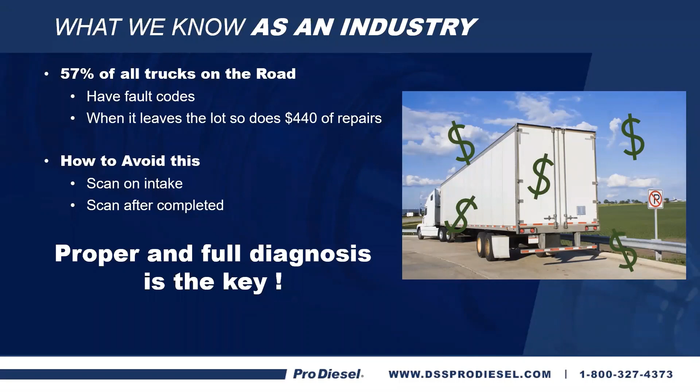The proper thing to do is get a full diagnosis, full. And you're going to get tired of hearing me talk about root causes. Root cause is the number one thing we have to point out. We need to figure out, when you have an injector that fails, is it a fuel-related problem, an electronic-related problem, mechanical, or just human error? The most obvious part of a failure is not usually the probable cause.

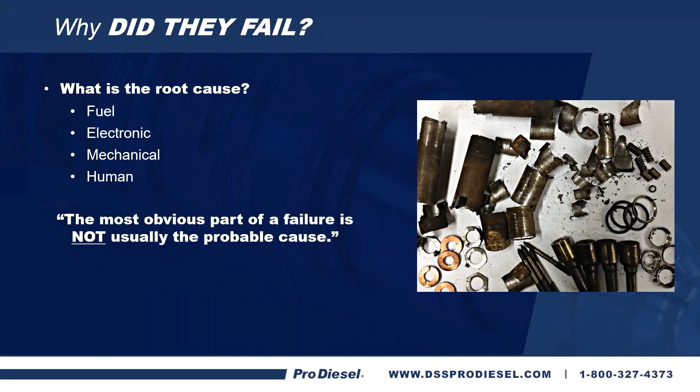So again, you must find the root cause before replacing the injectors. Something caused that injector to fail—whether it was dirt, contaminants, water contaminants, or electrical. These injectors are made to run about 750,000 miles before they wear out, so anytime under that, there's a good chance it's not the injector that caused the initial failure.

If you don't fix the root cause, guess what? You're going to put in a set of injectors, you're going to have the same problem, and you're going to think it's an injector problem. No, there's a root cause to it. We'll go over a little bit about what those may be as well.

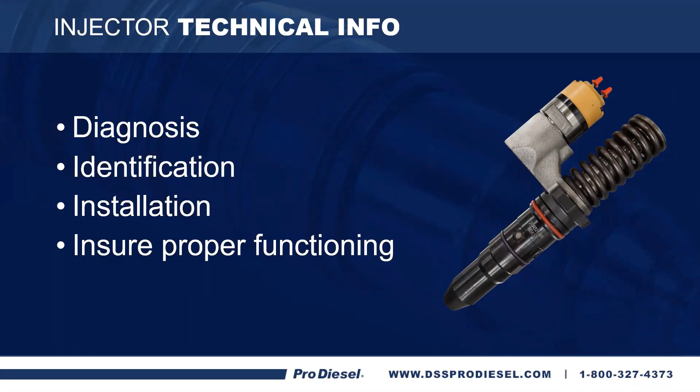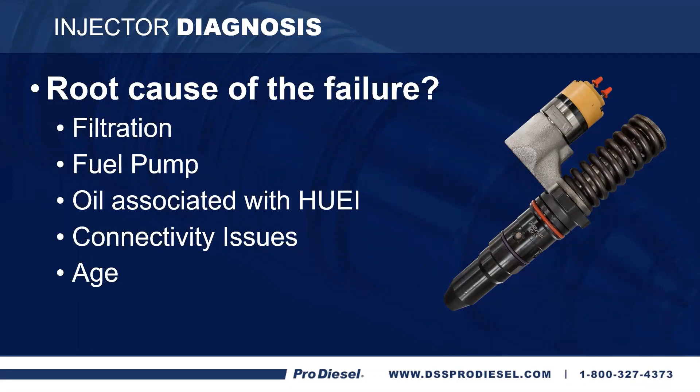So today we're going to talk about diagnosis, some identification of the issues, some installation procedures, and then make sure you get a proper functioning injector when you're done. Root cause—is it filtration, fuel pump, some oil associated with some of the HEUIs, a connectivity issue, or just pure age? Did it finally give up the ghost?

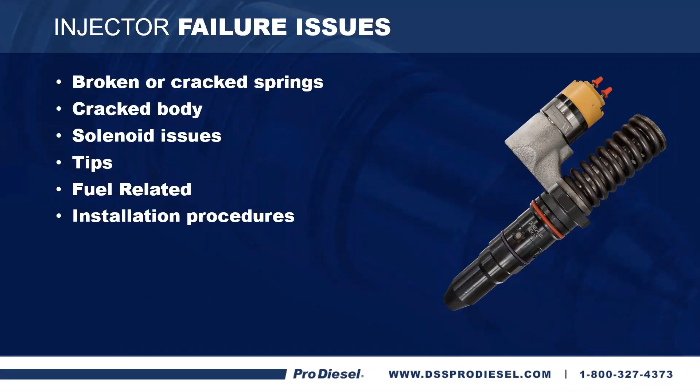There are some common injector failure issues we'll talk about: broken or cracked springs, cracked bodies, solenoid issues, tips—some information around tips—and then some information about fuel-related pieces, and also some installation procedures.

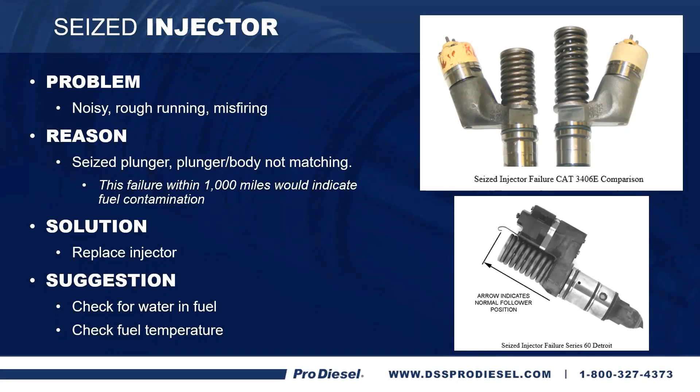It's actually stuck in there. Most of the time when that happens, if it's within the first 1,000 miles after you've replaced the injector, it's more common that it's a fuel-related issue, with a piece of dirt contaminating it and locking it up so it won't flow freely. You're going to have to replace the injector. You need to check for water in the fuel or the fuel temperature getting too hot, as that can cause a problem too.

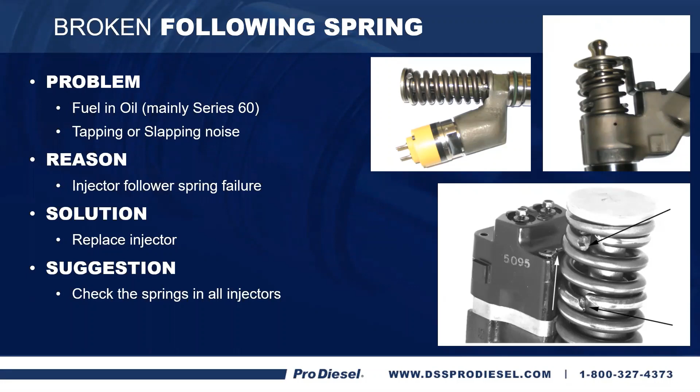A broken follower spring - you can see in the pictures where they're broken. You'll normally notice this as fuel in your oil, mainly on a Series 60, or you'll get a tapping or slapping noise. The injector follower spring has just failed for whatever reason - age, or who knows what. Sometimes they just do. You'll need to replace the injector, and you'll need to check the springs on all the rest of them, since they may all be at an age where they're starting to fail.

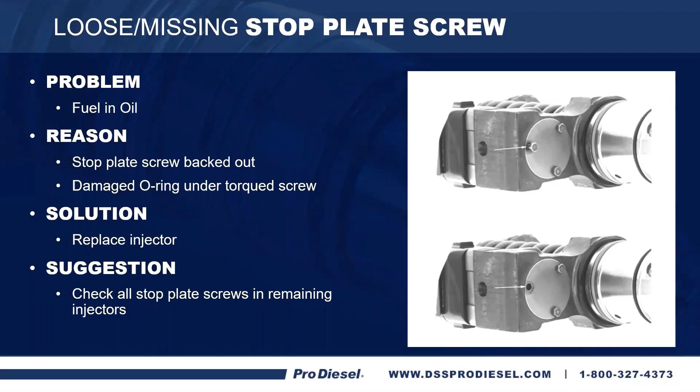Missing, loose, or missing stop plate screws will also get you fuel in your oil. Those have either backed off or been over-torqued or damaged under-torqued. So what I'll tell you is don't mess with these screws - they're set from the factory, torqued down to the proper specs. Thinking that turning them a little more might help will flatten the O-ring incorrectly, so they'll be improperly torqued all the way around and you'll have the same issue. Most of these break if you get them just a little too tight - they break right off. You can see what to do there - you'll have to replace it and check all the others as well.

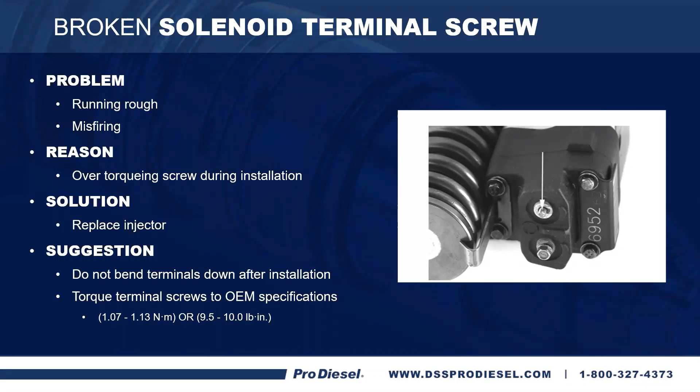Failed or blown spray tip failures - here's an interesting one. Of course, it's going to run rough, misfire, have low horsepower, or black smoke. The reason it happened is the unit was damaged during installation. We see a lot of people bump these, drop them, or hit them before they install them. It could just be fatigue too - sometimes when you get close to 750,000 miles, they start to wear out.

The other cause is water contamination. If you get water in your system and it gets all the way to the injector, water is not going to compress and it will blow that tip and tear it up. Or you've got a dropped intake or exhaust valve, which could hit it as well. And of course, you need to check all the rest of them to make sure you don't have that same issue in some of the others.

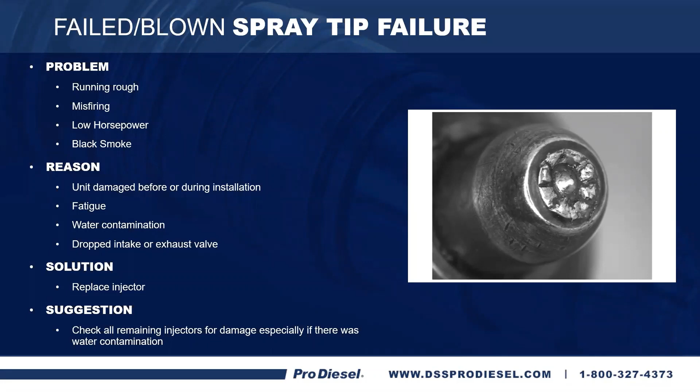A low pressure plug leak - you're going to notice fuel in the oil again. The main reason here is it's gotten old and fatigued, and you need to check all the rest of them because that means they're probably all about that same age with that same issue.

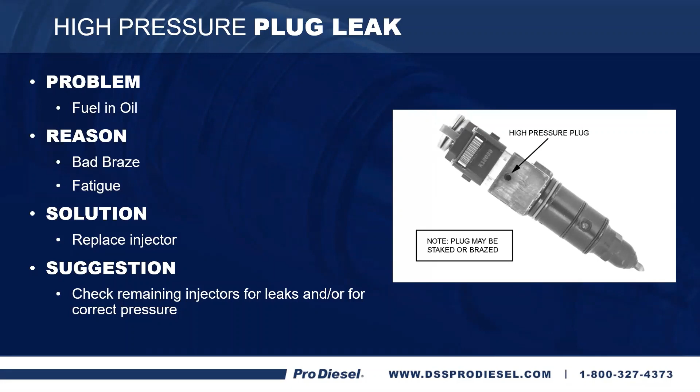High pressure plug leak - again, fuel in the oil. This could have happened from a bad braze, or it could just be fatigue. So you'll need to check to see what you've got, and again, check the rest of them. These are just some of the highlights of seeing how these work and what you actually see as a failure.

Here, trim codes - we've been asked a lot about trim codes, so I wanted to talk about that. This is something you must do on certain engines - Detroit and Cat, only certain platforms of those actually need them as well. You'll need software to install those, and most of the time it's the OE software.

There is Cojali - it will do Cat as well as far as putting the trim codes in, and it must be done to have the engine run right. The reason is you're telling the ECU that you have a new player, that it needs to learn, that it's going to run a little different. It's going to play that when you put a trim code in - it knows where to start the process.

If you buy CAT injectors from us and you need the trim code, we will send the disc with the trim code. We have all the OE trim codes for those. The key is to make sure that if it needs it, we always send it. If it doesn't need it, we don't send it. We get phone calls saying they didn't get a trim code with their CAT injector — you're not supposed to with that injector, it doesn't need a trim code.

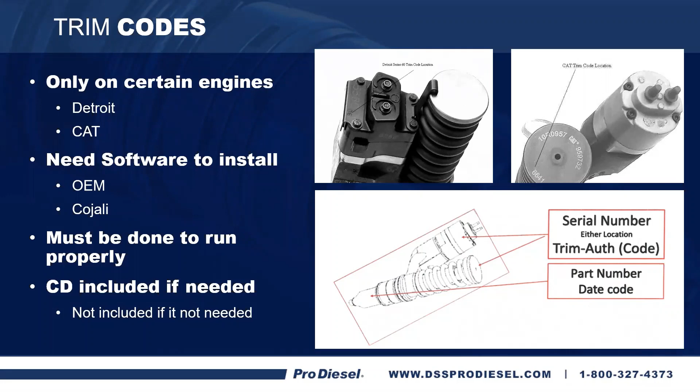On the international HEUIs, a lot of times you get a split tip, and this is normally due to low fuel pressure, air in the fuel, misalignment, or a worn injector tube. If you're putting another set in and the injector tube's worn a little bit, it's going to cause a misalignment. If you've dry started this engine, turning it over without doing the right things, you will cause this tip to crack. The reason is the hydraulic cushion caused by the fuel oil.

Dry starts will pop these things in a heartbeat. Split tips will happen no matter who you buy these from, whether you buy them from us or anyone else — they will happen on a dry start.

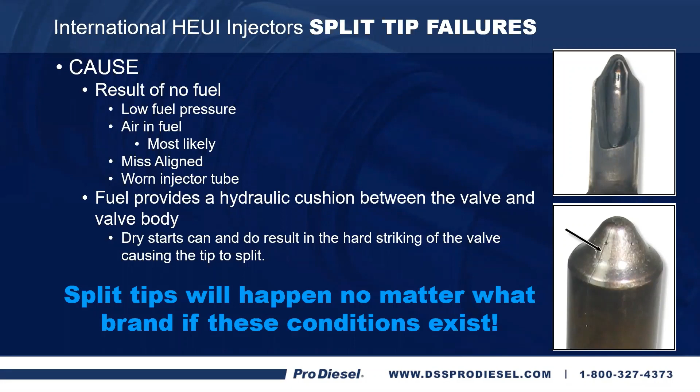The corrective thing to do to avoid that is to prime the engine before you start it, and operate the engine with proper fuel pressure. Make sure you're getting the right pressure — low fuel pressure will cause this because you're not getting the cushion. You need to replace the fuel filter, clean the fuel strainer, check the lift pump, or you've got air in the fuel. If you get air in the fuel, you're going to get the same thing that happens on a dry start.

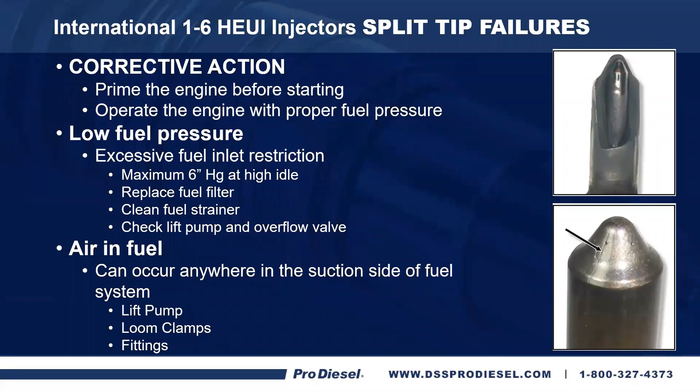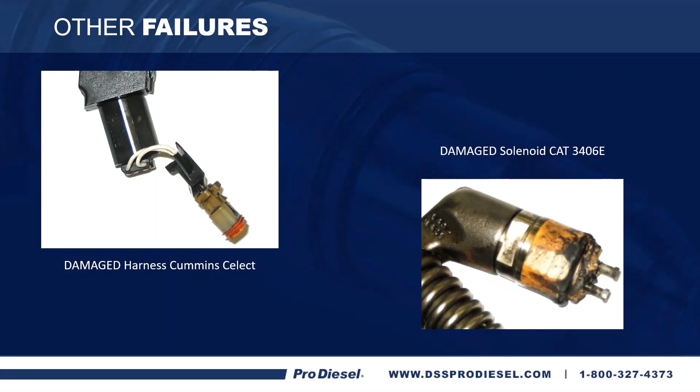Some other common failures on Cummins Celect — we get a lot of failures from a bad wiring harness or a damaged solenoid, and these are just pictures of a CAT 3406E: damaged or tipped during installation, another where the tip's been dropped, cracked, or tipped over in the other picture. Just a little bit to understand what you're looking at and what those failures may be.

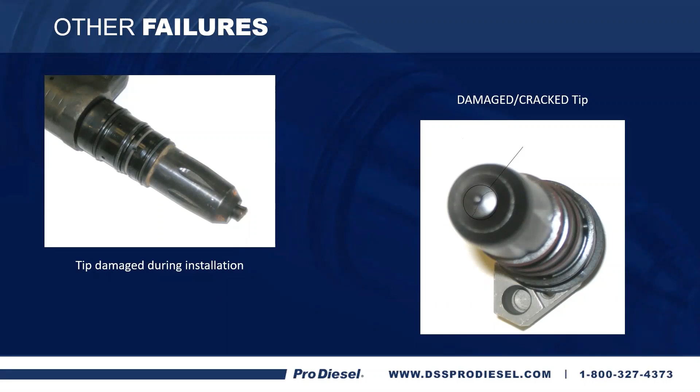So let's talk about some of the other stuff we see going down the road. If you're getting black or gray smoke, you need to check your fuel to make sure you've got the proper grade — sample the fuel and submit it for testing. If it's an improper grade of fuel, there's a lot of steps you'll have to take: flush that system and start all over, replace fuel filters and fuel lines, redo the fuel tanks, and test it again to make sure it's running correctly. It could also be from a faulty injector with a blown or plugged nozzle.

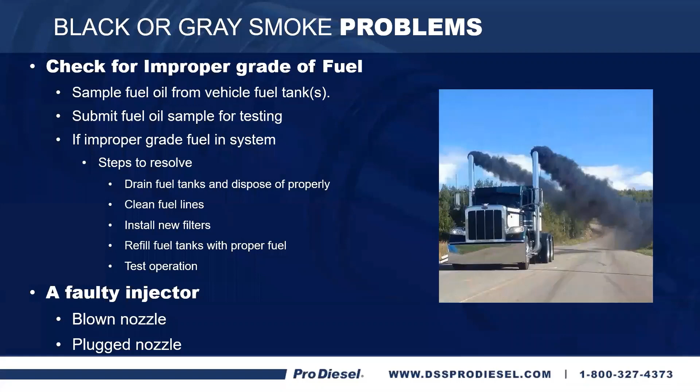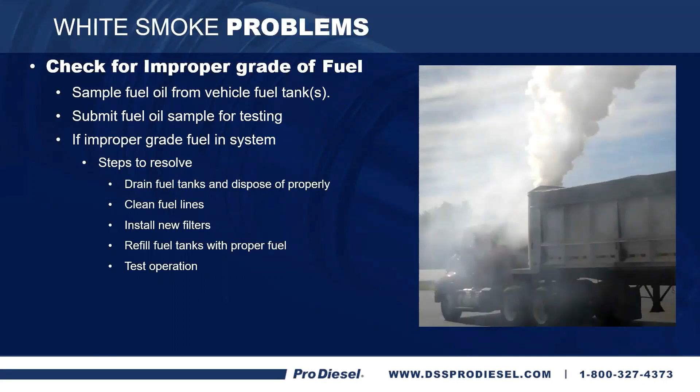White smoke is a little more involved. You can check for improper fuel grade again — same things apply — but it could also be aerated fuel. Always refer to your OEM guidelines on how to check for aerated fuel.

Here's a list of things: disconnect the fuel line return hose. I thought this was a really great way to test — set the container above the engine and run it at 1,000 RPM. You'll see if there's foam or bubbles in that fuel, which tells you you're getting air in your fuel.

Then there are a lot of little things you need to check: tighten all the fuel line connections between the fuel tank and the fuel pump, visually inspect all these other items, and repair any damaged components. If it still smokes after passing the aeration test, you need to check for improper calibration on your injectors.

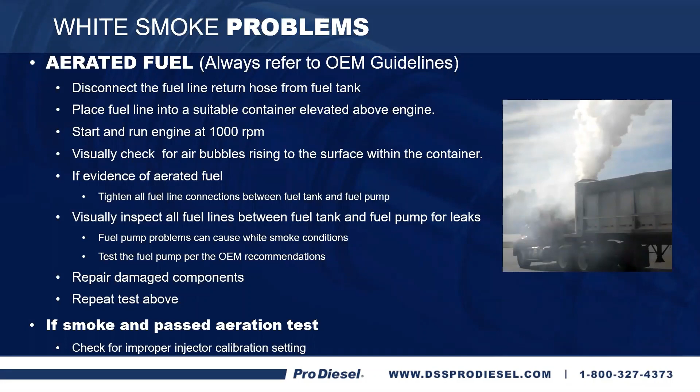Before replacing injectors, determine the root cause of the failure. Correct any possible contamination issues, metal, failed high pressure pumps, poor fuel handling—flush the system. These are really critical things to do. We find so much goes wrong because people just didn't take the time to look at their fuel and make sure it's right.

People ask why injectors fail right out of the box. Well, 65% of everything we get back from ProVantage warranty, we actually check to see what's wrong with those injectors. 65% of that is a non-injector related issue—contamination, O-ring damage, diagnostics, it's been improperly diagnosed that there was a problem to begin with, or it's an inherent OEM injector problem.

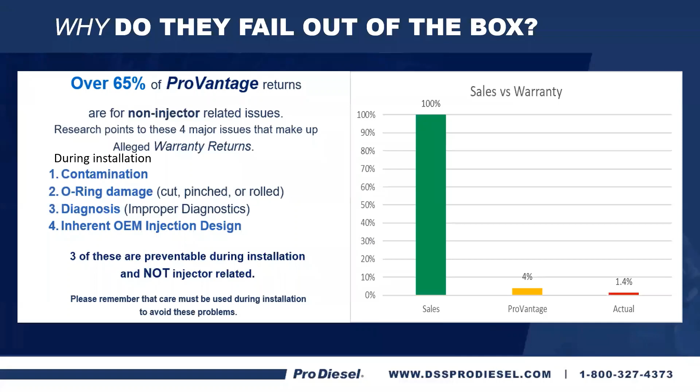Whether you buy certain injectors from us or the OE, if it was a poorly designed injector, we can't redesign it. We can just make it run as good as it can to match the OE spec. We can't change a HEUI from being a HEUI—it is what it is. Here's a good graph that shows that.

Let's talk about what makes up the 65%. The number one thing is contamination—it makes up 60% of everything we get back on failed warranty. It's either storage—do you buy your fuel in bulk? Is it a reliable source? Is it the right type of fuel, highway or off-highway? Do you have the right additives in it? Particulates, and water in the fuel—we'll go over these a little more.

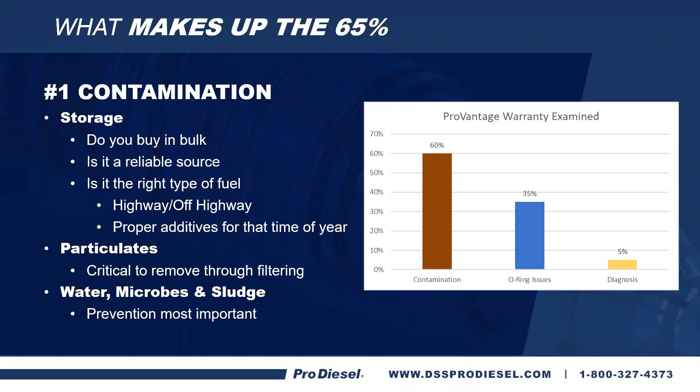When I talked about fuel storage, one of the things that puzzled me most as I researched all this was looking at diesel fuel—the latest study shows it degrades 26% in the first 28 days, and 95% of all fuel has water in it. Knowing that, people are not using enough additives and enough filtration to get good, proper fuel.

What's changed over the last few years? 20, 30 years ago, you could have kept fuel for 10 years and it would have been fine. Today it's changed because they use hydrocracking, which splits the molecules, making it faster and easier to make fuel. It's also a lot less stable because of that.

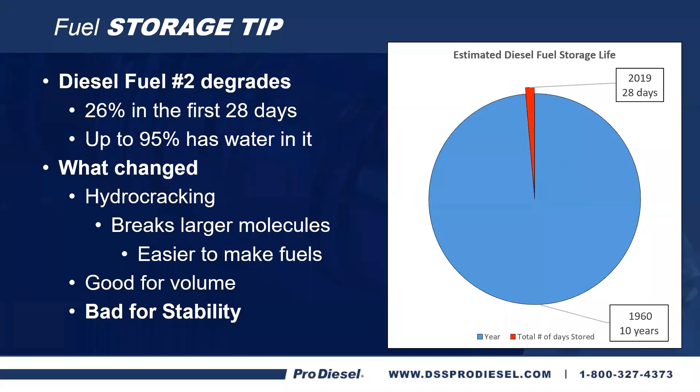The most common fuel-related issue with particulates is you need to test your fuel and change your filters by OE recommendations—some as little as 10 to 20,000 miles. Flush the system if you're putting new injectors in, clean the installation area, clean the fuel line connectors. Before you unwrap that injector, put on new gloves, clean your hands, do whatever it takes to keep things clean. My wife is a nurse, and we call this sterile technique.

You need to do it like you're trying to keep them perfectly clean, because that's exactly what you need to do. Remember, some of these electronic injectors have a 2 to 5 micron tip—that's dust off of a rag. It takes 25,000 microns to equal an inch. It's amazing what little it takes.

If you're using a 10 micron filter and you've got a 5 micron tip on your injector, and you're putting in 10 micron filters because they're less expensive and don't clog as quickly—you're right, they don't, but the fuel injectors become the most expensive fuel filter on the truck. That will clog, versus the smallest particle filters, which catch the most dirt.

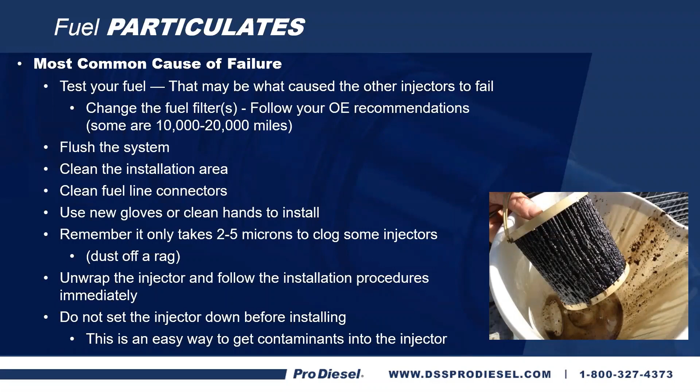Unwrap the injector only when you're ready to put it in the engine. Don't take it out and lay it on your cart or on top of the engine. Take it out of the wrapper as you're sticking it into the cylinder.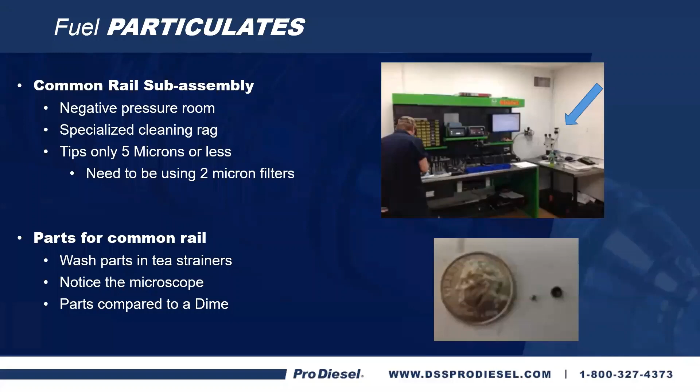And this is some of the parts that you can see next to the dime there that show you how small the parts and pieces are. We actually use tea strainers to wash those parts. It's pretty amazing to see how they can put those things together. I understand why they have a microscope. I just don't have that. My hands are too shaky to be able to do anything like that. I don't have the dexterity.

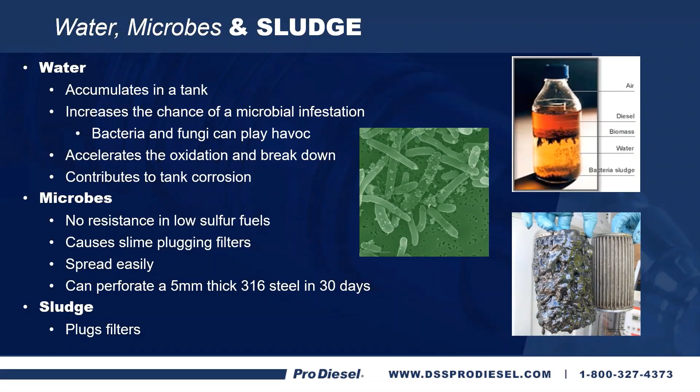Let's talk a little bit about water, microbes, and sludge. Water is in, like I said, 95% of every fuel has water in it. So that increases your ability to get microbial infections. Bacteria and fungi can go crazy in there. It accelerates the oxidation breakdown, which makes it break down faster, and contributes to tank corrosion. Also microbes, because we're using low sulfur fuels nowadays, wreak havoc. You guys really need to be treating your fuel and making sure you've got good quality fuel and it's working right. And sludge, of course, you can see that it'll plug filters like crazy. It can also be spread. Microbes and sludge both can be spread from one truck to another, so be careful on that.

So the questions I always say that you guys need to ask yourself: Have you checked your tanks lately? Or if you're buying in bulk, have you checked them to see what was going on with them? Is there anything in there, water, dirt, contaminants? When was the last time you had your fuel tested to see if you've got an infection going on in there or something like that?

What can you expect if the fuel is bad? You're going to be dumping some fuel. You're going to have to either treat it or try to get rid of it. You're going to have to figure out what you do with those, and there's different ways of handling that. Have you checked for microbes? Which is best for you? There's mechanical washing and chemical solutions that wash your fuel. And can you do it yourself, or do you have to pay someone? Those are the things that I look at.

And believe it or not, we just would love it if you filter, because your bad experience with a set of injectors, as we just looked at, if you have a bad experience with a set of injectors, it's probably contamination more than anything else, most likely cause.

So the second part of that is during installation. The most common issue you'll get is a cut or a flattened O-ring. It's normally in the back cylinders where it's harder to reach, harder to get to. You can get combustion heat and it can result in these O-rings getting torn up. Trust me, when we test our injectors, after they've been in the test machine, we take them out, we put all new O-rings on them, brand new, the proper O-rings, and then they're sealed. And they put tip protectors on it, and they're sealed. So we know it's got brand new O-rings, it's clean, it's tested, it's matched, it's ready to go.

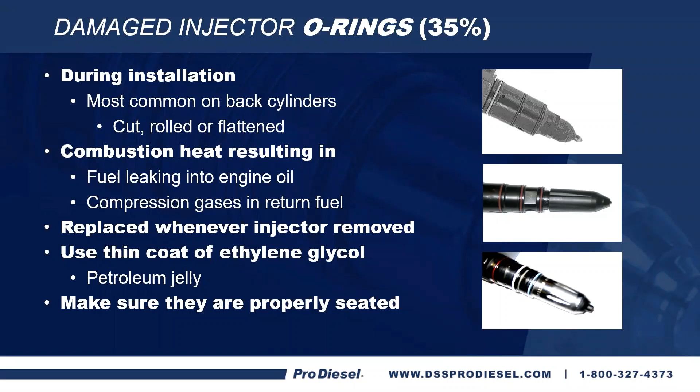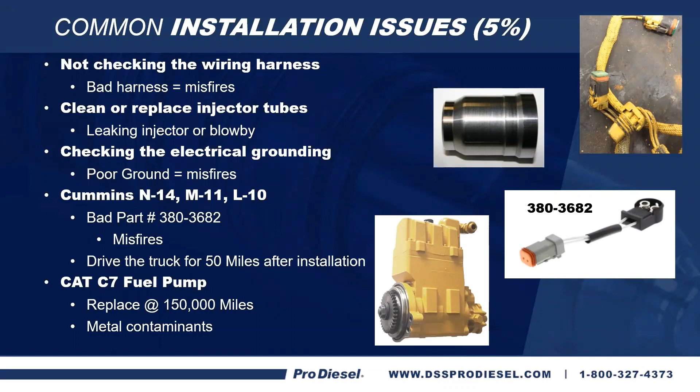Another one of the more common off-site issues is a bad wiring harness. You'll see several of those. Some of the Detroits and some of the Cummins are really bad about it, and you need to make sure you've got a good wiring harness that works well before you try to install injectors. Injector tubes, make sure you look for any that are worn, you need to replace those. Check for good grounding, you'll get misfires if you don't have a good ground on there.

This part number that you see over here, it's a bad part number, it's been known for a while, I just bring it to your attention. And again, I go back to, if you're putting Cummins CELECT injectors in, please drive it for 50 miles after you put the injectors in it before you call anybody or do anything.

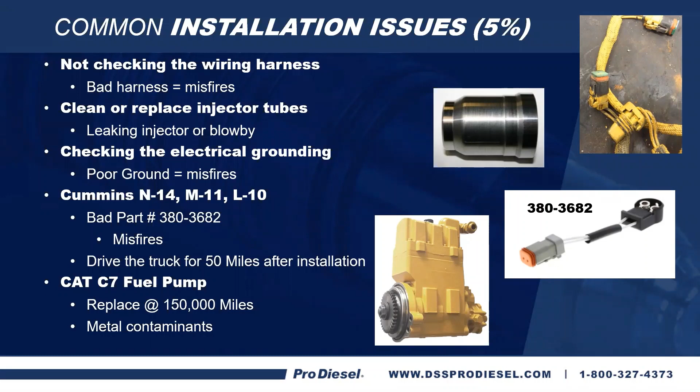That is a must. On a Cat C7, make sure that you're looking at your high pressure fuel pump. You want to make sure, because they will destroy themselves after 150,000 miles. They start throwing metal into the engine, and it'll clog an injector in a heartbeat. So if you put new injectors in it, you want to make sure you look at your pump and probably just replace it at the same time.

Some other common installation issues that we've seen and heard about that you guys need to be aware of: check your fuel equalizer, make sure it's not plugged or frozen. Check your fuel pressure, make sure you're getting adequate fuel pressure. And use the correct diagnostic software, OE quality or qualified aftermarket software. Keep it up to date, use the proper connectors.

When you need to have a trim code, we'll send you the trim code, and you need to find the root cause. Not finding the root cause is the number one issue because, like I said, with contaminants, 65% of that is contaminants that cause the problem. That's a root cause, not just the injector. So that's kind of what I have for you today.